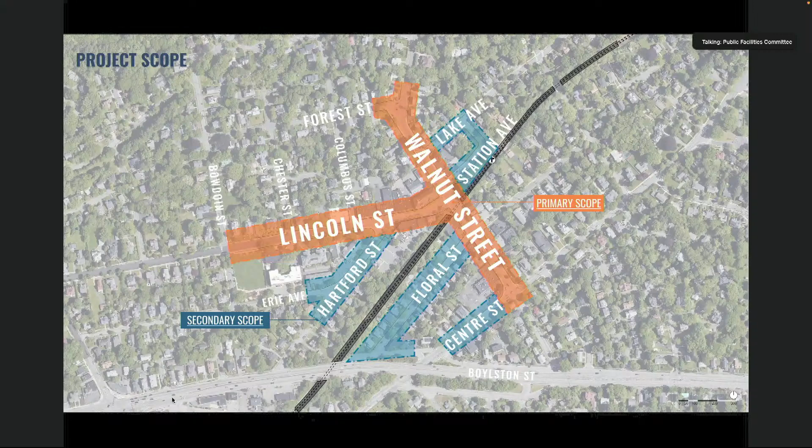So the first slide encompasses the primary scope of work, which from the very beginning—Lincoln Street to Walnut Street—was the key part of this whole Newton Highlands renovation project.

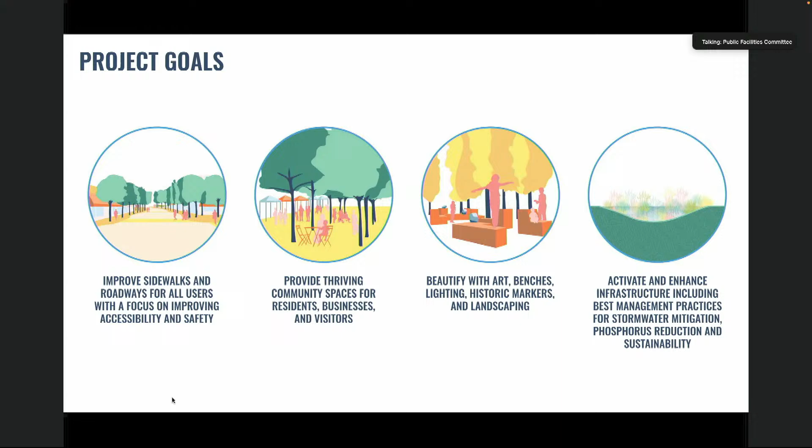We discussed intersection by intersection through this whole concept, and we came up with four intersections plus one additional item for lighting: the intersection of Lincoln and Bowdoin, the intersection of Lincoln and Hartford, the intersection of Walnut and Station, and the intersection of Walnut and Floral Street—with different solutions for each.

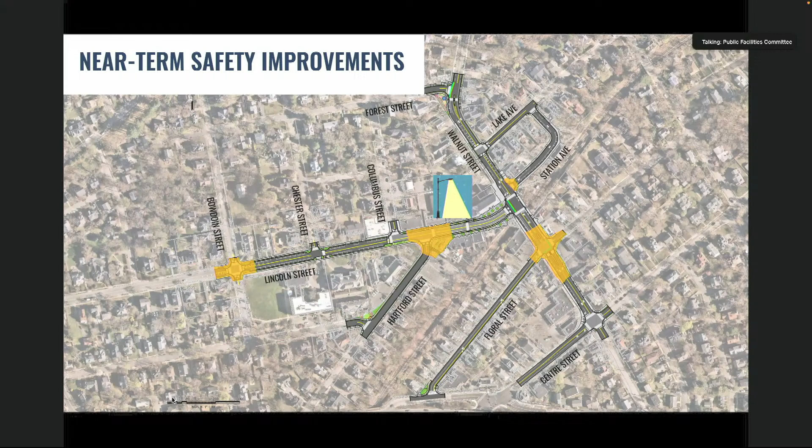On the next slide is the existing conditions about Lincoln Street and Bowdoin, at the Hyde Playground with Bowdoin Street and Lincoln Street. As Barbara Darnell from the Highland Area Council can attest, there's been a number of accidents at that intersection—there was even a pedestrian hit. So we decided that was one of the significant improvements we needed to make.

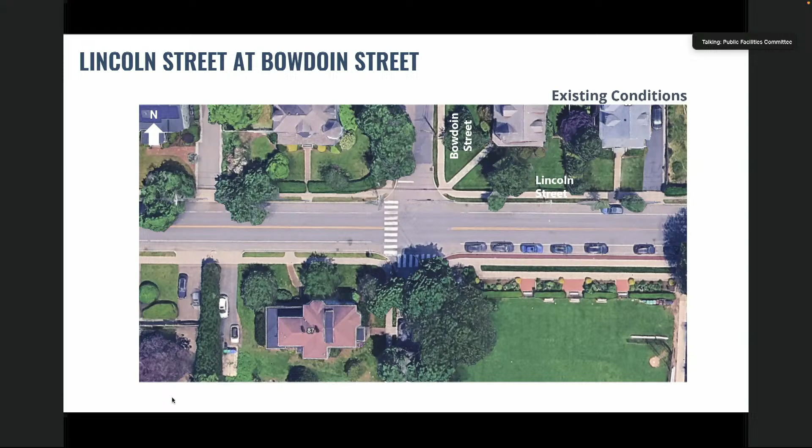The next slide talks about what we were trying to accomplish: making the crosswalk shorter, similar to what happened in Newtonville, having bump-outs to make everything shorter, and a raised table to slow everyone down. This is a straightaway in Newton Highlands where people usually pick up speed—even with police-directed patrol in the area, there's still a significant amount of speeding, especially on the straightaway.

One reason we viewed this as a significant impact is the Hyde Community Center has been known for Friday night concerts for the last 19 years, drawing a significant number of people every Friday night in June, July, August, and part of September—anywhere from 200 to 400 people on a typical Friday night, and a significant number cross at that crosswalk.

So we're also talking about having an RRFB with a flashing light on the crosswalk, so that people going to Hyde Playground, whether to use the kids' play area with their families or to go to the bandstand, can cross safely. We figured this is an important intersection to take care of for safety.

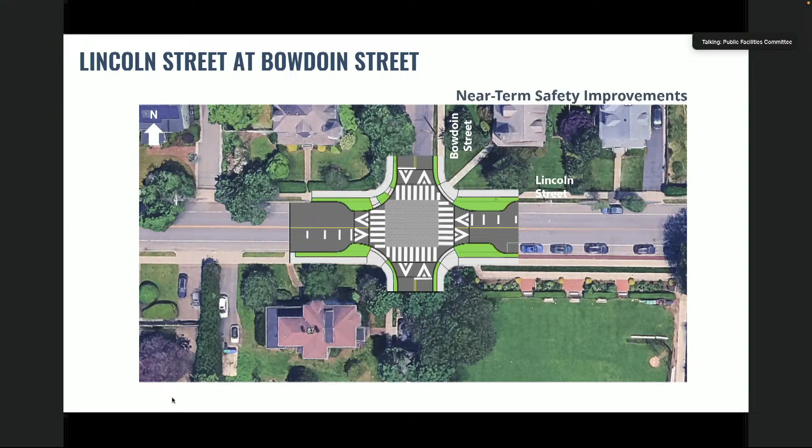The next street we looked at, also a high priority for the working group, was the intersection of Lincoln Street at Hartford Street. It's a very wide intersection on Hartford Street, known to be a U-turn haven for anyone coming down Lincoln Street. There's usually a no-U-turn sign that people go around and knock over while making the U-turn.

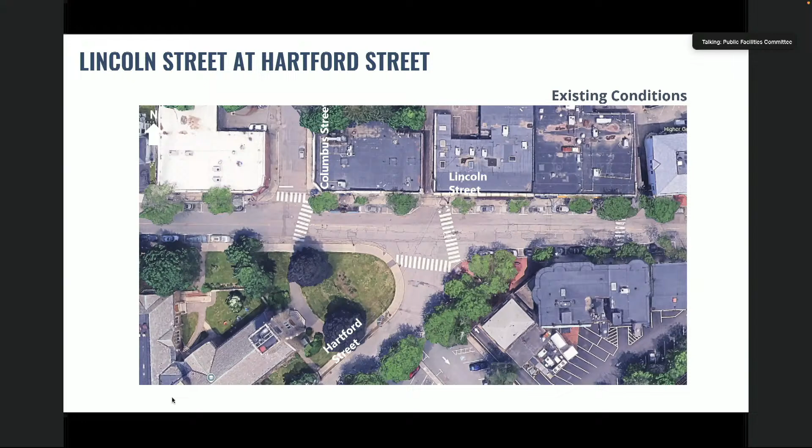Newton police have had directed patrols where they sat there only 10 or 15 minutes and would pull 3 or 4 people over. So just the cars going through that intersection has made significant impact because it's such a long crosswalk.

Also because it's such a large entrance to that street, it has become a significant safety issue. And that's the existing condition. So there's a number of things we're going to be trying to do here with Rodney Barker Square, which is on the corner of that intersection. We'll be talking about expanding it, which would make the intersection and crosswalk significantly smaller.

We're also talking about putting an RRFB in that intersection for that crosswalk, because there's a significant amount of crossing from the parking lot in Newton Highlands across Rodney Barker Square and across that intersection. This is going to have significant safety improvements for that intersection, and I'll talk about Rodney Barker Square in a little bit.

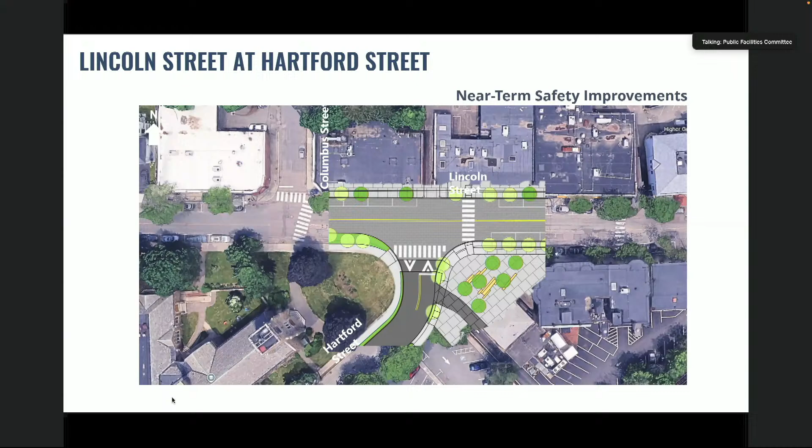If everyone knows, Rodney was a former city councilor, former school committee member, and he, with the city council a number of years ago, made this Rodney Barker Square. However, there's significant problems with it. A lot of the improvements in the Highlands were done in the 1970s.

The Rodney Barker Square is made up of bricks, and the bricks have been popping up because of tree roots and other things. It's been needing for many years to have a flat surface for people with mobility issues, because there's a number of people in nearby housing who are in wheelchairs that have a hard time getting through this because of the bricks.

What ends up happening is, as bricks keep popping out, we put asphalt patches in for the city. But basically this area is the center of Newton Highlands, and by having improvements there, it's going to have a significant positive impact on Newton Highlands.

On the next slide is the concept plan. We're talking about planting, and one of the things the working group would like to do is actually start meeting with the community to get feedback about building Rodney Barker Square—where do the trees go—as we're putting porous pavement in different places.

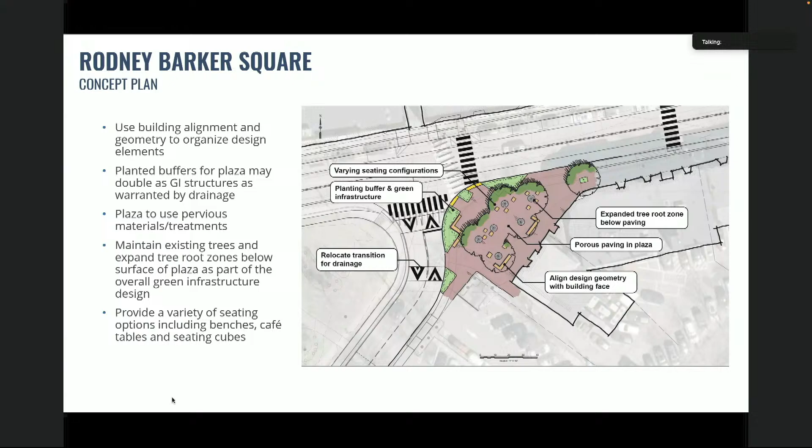Right now people come off of Lincoln Street at high speed, hit Hartford Street, trying to get to Route 9 because that's where Waze is bringing them. It creates a high-speed intersection at that point, and as we do this safety work, it will make a significant positive impact.

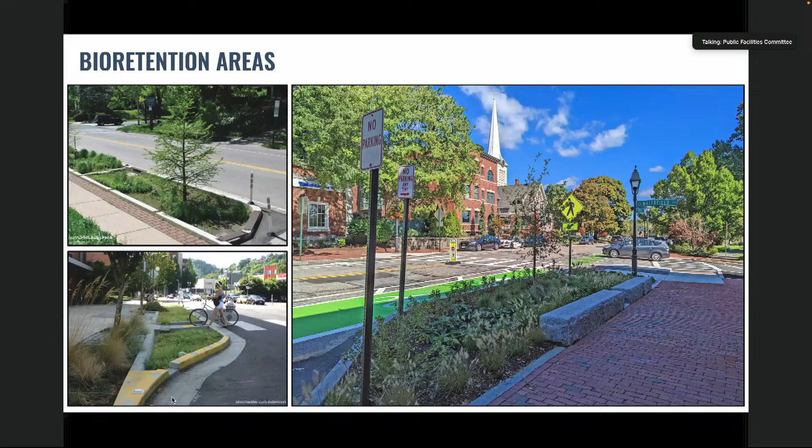There's a number of slides here about green infrastructure, bioretention areas, connected plantings and tree trenches. What I want to say is the working group really wants to get feedback from the Newton Highlands community about what the result should be—what the trees should look like, how the green space should be.

Whenever the commissioner has a community meeting about Newton Highlands renovations, there's usually a large turnout. We definitely think there will be a large turnout of people giving feedback about what Rodney Barker Square should do, how it should look and be used—both because it impacts all the restaurants with table seating and benches where people get their food and end up staying, and whether there's lighting in the trees or how the configuration is.

So we don't have a solution for that yet. However, we're going to be working with the community to come up with a solution as the working group continues working on different Newton Highlands projects.

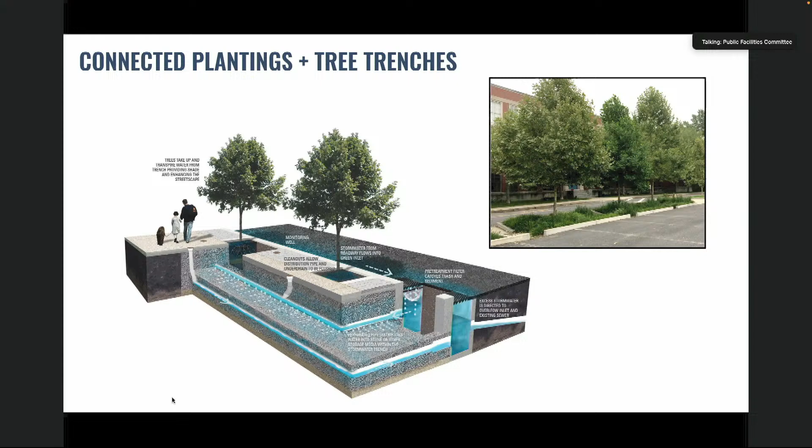Now we move on to Walnut Street. The first one we have is Walnut Street at Floral Street.

The existing conditions - this is also a street with significant speed and a significant amount of traffic going into O'Hara's restaurant at that intersection. There have been people hit in the crosswalk there. There's a lot of cars moving in many different directions, and it has had some significant safety issues with the community.

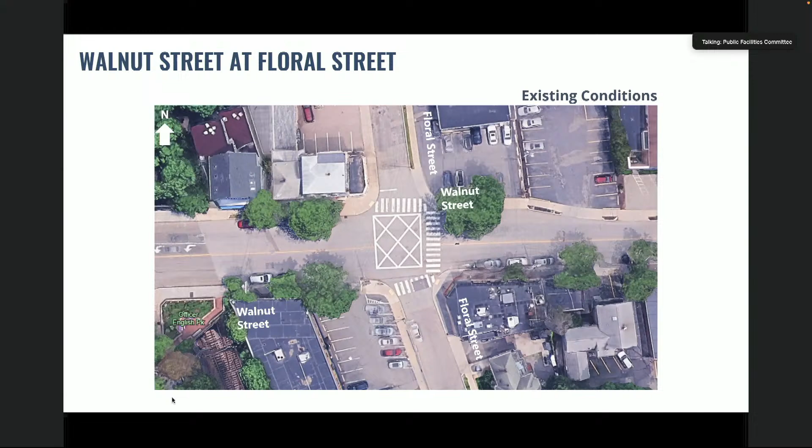So at the Floral Street, Walnut Street intersection, we're talking about bump outs, a shorter crosswalk to get across Walnut Street, and islands to slow people down as they try to get to the lights at Lincoln Street.

It also makes the Floral Street and Walnut Street intersection much safer for the community, especially given the amount of usage in this area. We're also talking about putting another RRFB in that location, because a lot of times people are coming off the Centre Street intersection at high speed to hit that intersection, and we're trying to make it much safer.

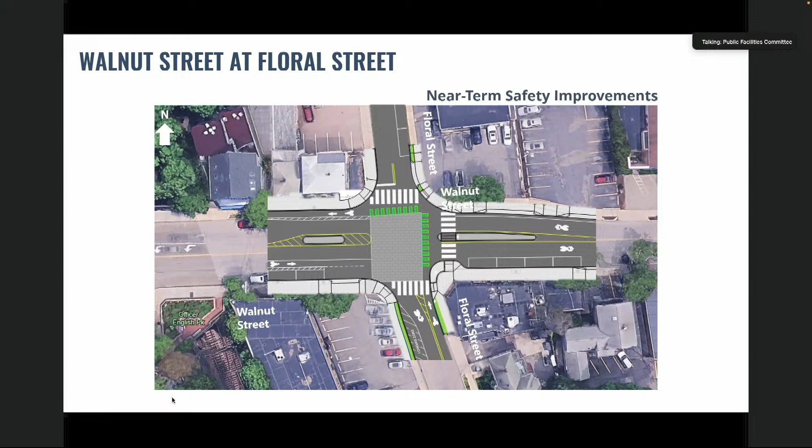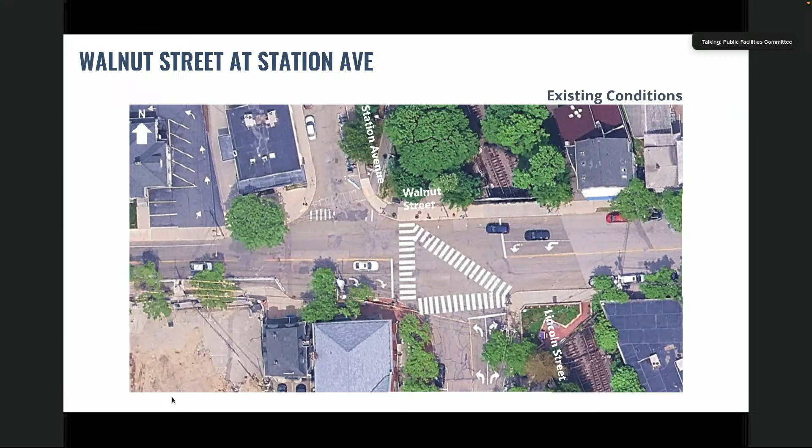We also have the Walnut Street at Station Ave intersection. That intersection is the center of people going to the Newton Highlands MBTA station. As you can see, it's a wide street at Station Ave, and we're talking about putting bump outs to make that intersection much smaller.

Every decision hasn't been unanimous - there's a lot of community input about different directions on phase 2. What the working group decided was, we're probably 80% there. There are some questions about right-hand turn lanes off Lincoln Street, left-hand turn lanes off Walnut Street, and other things in that area. So the working group said, until we get closer to identifying the funding, and if this project does get broken into smaller sections, we may not be dealing with this for a number of years.

So instead of going through a whole community process fighting over that last 10 to 20%, we decided to focus on the things we can do now, and we'll come back to this as we go through the whole phase 2 implementation.

There were also discussions about bike lanes, particularly painted bike lanes around this area. We also had many discussions about parking, and about the right-hand turn lane coming off Lincoln Street a number of times, and how that impacts traffic on Lincoln Street and Walnut Street.

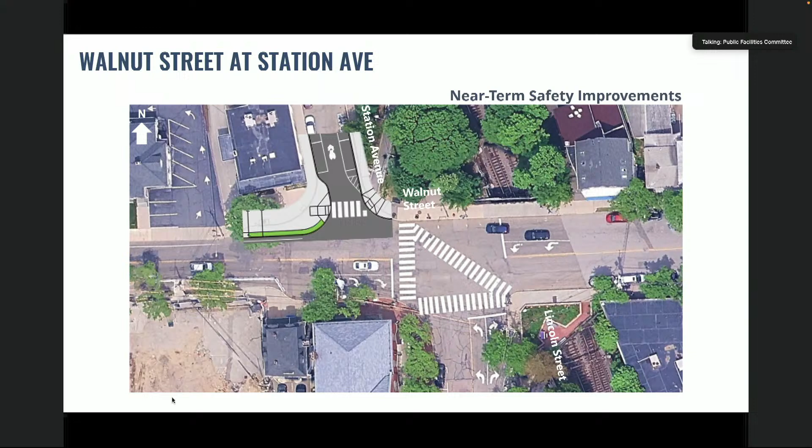The final thing we discussed was street lighting in the village center. If we make the impacts on Rodney Barker Square - for many years, all the businesses and a lot of the users of the Highlands and residents have said the lighting in the Highlands is really bad. Once you hit night, it just doesn't support the economic development of these businesses and impacts the neighbors and all the members of the Highlands community.

So we added in, just on Lincoln Street, some significant lighting changes that would have a positive impact on the community. We still believe that's a safety improvement because there's a lot of foot traffic going into restaurants and stores at night. We think this would both enhance the Highlands and enhance the safety of residents.

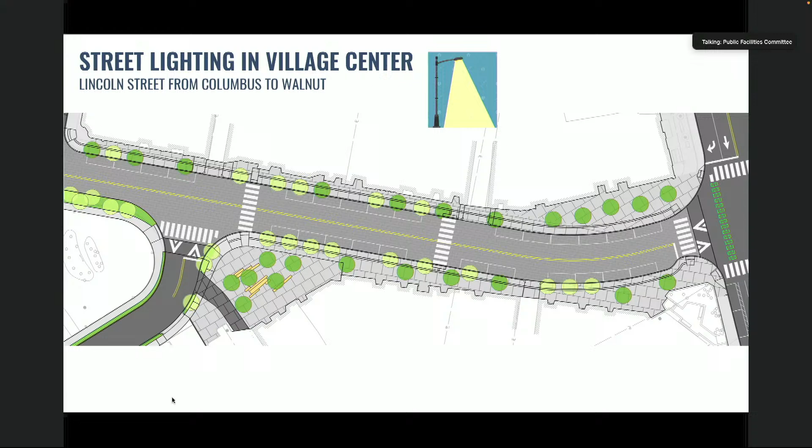So getting to cost: the Lincoln and Bowdoin Street intersection, the consultant estimates at $425,000. The intersection of Lincoln and Hartford Street is $600,000. Rodney Barker Square, where we rip it all out and start from scratch, is $850,000. Walnut Street at Floral is $625,000, and Walnut and Station is $135,000.

The street lighting would be $750,000, with a total budget for all the safety improvements of the Highlands of $3,385,000. The working group did work together to try to prioritize, if these safety improvements were going to be built over a number of years, which would be the priority.

It went back and forth whether Hartford Street or Bowdoin Street would be the priority, but the Lincoln Street intersections are the most dangerous intersections for Newton Highlands residents. However, since we went back and forth before the last meeting, we talked to CFO Maureen Lemieux and to the mayor, and instead of trying to break this into a 2 to 3 year project, the concept - because it impacts people's safety - is to bond this project at $3,385,000.

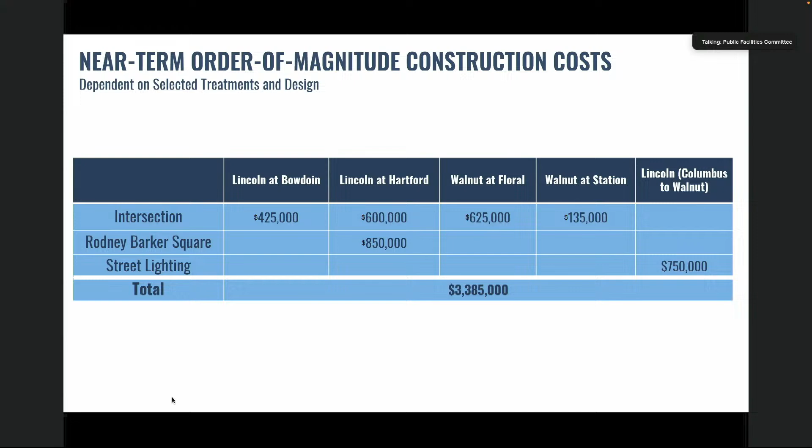Once we get to construction documents and get all the exact numbers for this, if we bonded it, because we've been talking about this for 3 years, we can make some significant enhancements to Newton Highlands, and it could be started and hopefully finished in 2027.

That's my presentation. But a lot of people put a lot of work into the working group, both on the administration side and the community side. Normally a working group is just within city staff and residents, but we opened the working group meetings to the community so people could be there. And even though we weren't running public hearings, we were taking comments from people because everyone had a lot of viewpoints over the last 3 years.

The working group is not going to end. We still have a number of things - there's some questions about bicycle safety, and some questions about how Rodney Barker Square will be. So the working group will be ongoing, and at the same time we're going to be working with the consultant. The engineering for these intersections also ties into the master plan, so the master plan is not ending. If the funding happens, we could do it in certain sections. Thank you very much for the time, and I appreciate all the work that City Council has done with this committee to make this project successful.

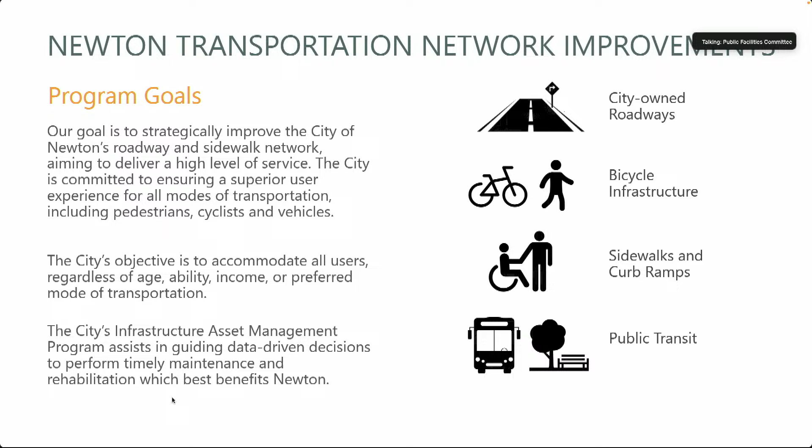In order to do this, we use an infrastructure asset management program. That helps us really use data to drive the decisions that we make so that we can be the most effective and efficient in utilizing city dollars to make the most impact on the transportation network.

So infrastructure assessment, like Shauna said, we look at roadways, bike infrastructure, sidewalks, curb ramps, traffic calming, but the biggest infrastructure that the city maintains, or one of the biggest, is the roadway network. The pavement structure throughout all the roads in the city is one of the most heavily used assets that the city owns and maintains. So it's really important to have a pavement management program and to make sure that we're keeping roads in good condition.

So having this data and having this system helps us to make sure that we're really providing the right repairs on the right roads at the right time.

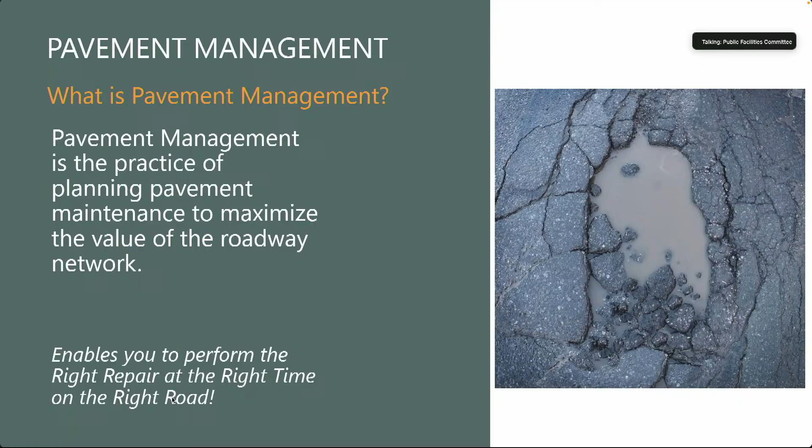To give a background, we scan the roads every 2 years. The roads were last scanned in 2024, so we're looking to rescan the roads this year. We use LiDAR and photography technology to drive all of the roads in the city, all the accepted roads that the city maintains. It provides photographs approximately every 10 feet, and from those photographs and videos, we can discern all of the pavement distresses on all of the roadways throughout the city. It's a very cost-effective method.

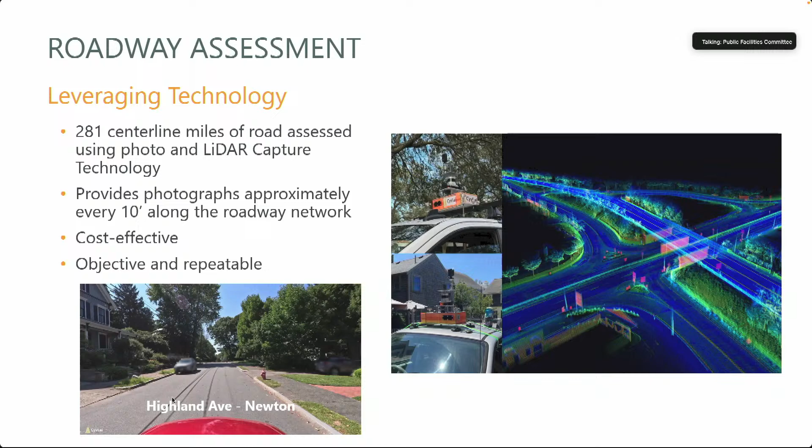It gives us new data every 2 years to make sure that all of our decisions are objective, and it's a repeatable process that we try to do every 2 years to give us fresh new data. The roadway conditions are very variable based on how the roadways are used with traffic, but also for winter cycles and weather. Last year we had a really bad winter, so how the roads are affected by that changes from year to year. On the years that we don't scan the roads, we try to use modeling to make up for that, so we're still making informed decisions. But as we get further away from an actual roadway scan, the more we're relying on modeling than actual numbers.

Once we scan all the roads, they get rated on a system from 0 to 100. It's called a pavement condition index. So if you see PCI throughout the presentation, it's just an index of what the score of that road is - 100 being the best, just paved yesterday, to 0 being almost a gravel road, really hard to traverse. We scan all of the asphalt roads in the city.

The concrete roads are also part of the program, but we deal with those in a different way. So once all the roads in the whole city are scanned, they're given a score between 0 and 100, and we put them in these maintenance categories.

100 being defer maintenance - you just paved it, you can wait a few years before cracks start to form. Routine maintenance - we have some practices like crack seal and fog seal to help mitigate cracking and make sure the asphalt pavement surface remains pliable.

We have preventative maintenance. We've seen this around the city with bonded wearing course, probably the most used one. But we've also done rubber chip seal, microsurfacing, and cape seal in the past.

When a road gets to about 70, it's in that minor rehabilitation category, which is mill and overlay - probably the most standard practice used in the city and throughout the Northeast. We've also done some other things like cold in place and hot in place recycling, which I'll get into later.

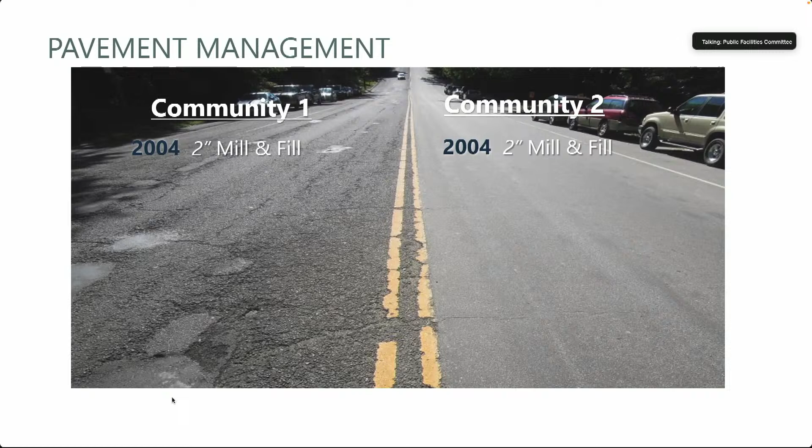Back in 2004, they came together and did a joint project. One community paid for half of the bill and the other community did the same, and they did a 2-inch mill and fill, which is they mill off 2 inches and come back and put 2 inches of new pavement. So the road was brand new in 2004.

In 2010, Community 2 came to Community 1 and said, we want to preserve this road. We want to do crack sealing and microsurfacing to really preserve all the money we spent in 2004. Community 1 didn't opt to go into that, so Community 2 did just their side of the road.

This picture was from 2017, so you can see the 2 different methodologies here. Community 2 has the optimized approach in 2017 - what they're looking to do again is crack seal and microsurface, which is a lot cheaper than doing another mill and fill or reclamation.

So at that point in 2017, it was twice as expensive for Community 1 to now come in and repave this road, whereas Community 2, having done the pavement preservation throughout the years, is doing it at a much lower cost and saved twice as much money.

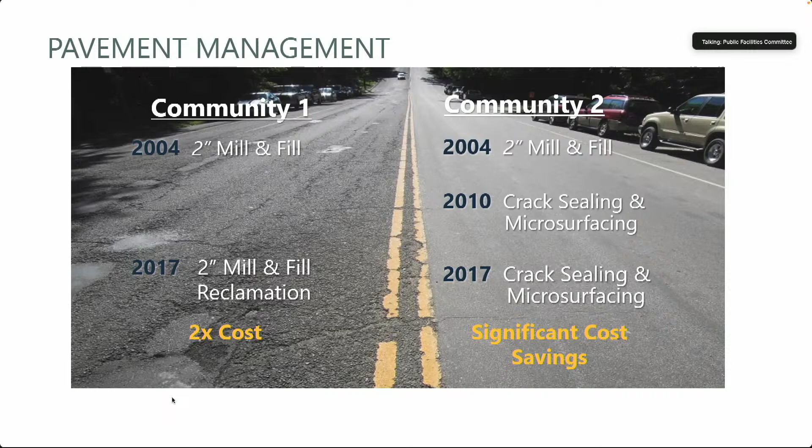Along with that, you can see the picture of this road. Which one would you rather drive on? Throughout that whole period, the people in Community 2 had a nice road to drive on the entire time, whereas in Community 1, it was really good when they paved it, but now it's really bad, and it'll be really good again when they pave it, but they're spending twice the amount of money.

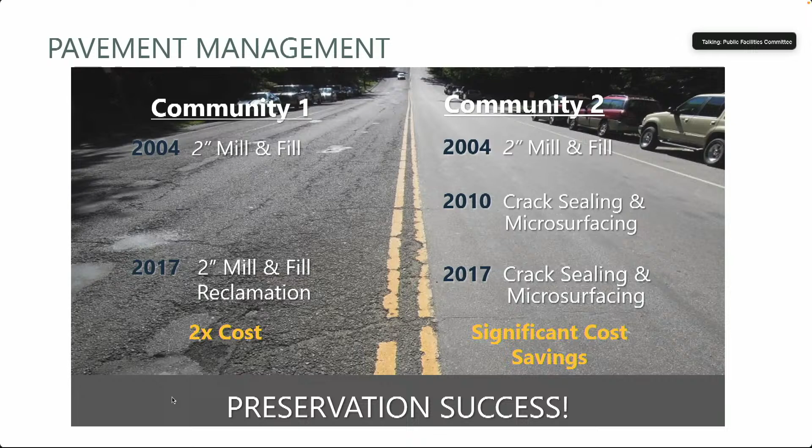So Community 2 had a preservation success, and that's what we've been doing in the city of Newton for at least the last 10 years.

So these are just some of the techniques we have in our toolbox. Once we scan and figure out what the PCI of the road is, we put it in those maintenance categories, and then we have a few different types of techniques we use in Newton to take care of those roads. One is crack seal—that's where cracks open up, we fill them so water can't penetrate into those cracks, freeze, and start to break apart into potholes.

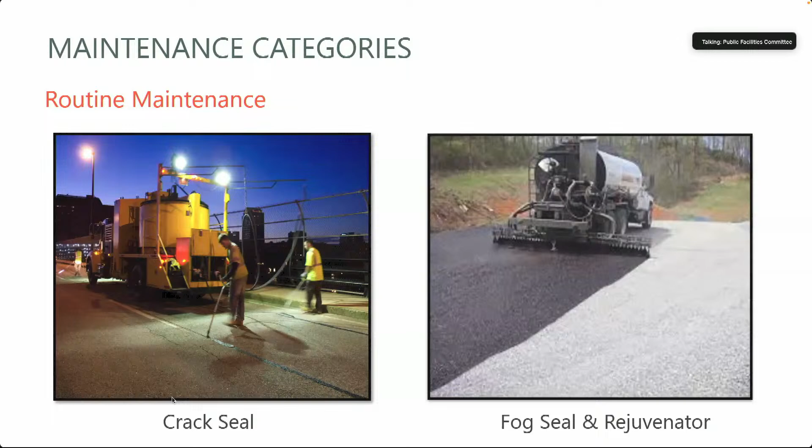Microsurfacing is very small, kind of like a driveway sealant, but more robust for roadways, to seal out the whole surface, stopping cracks from forming and keeping out water as a preventative treatment. Bonded wearing course is a very thin overlay, also very pliable. We just did this on Homer Street and Center Street recently.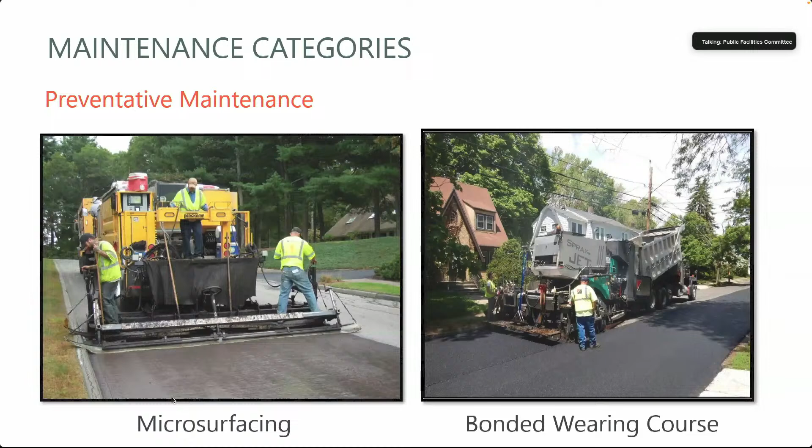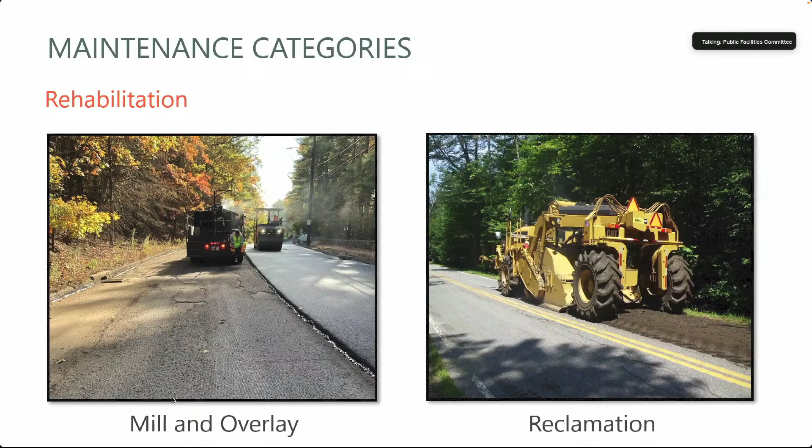Mill and overlay is one of the most widely used ones. We just did that on Beacon Street this year, and Fuller Street. That's probably the most common one. Reclamation is when the road gets really bad—you have to fix all of the sub-base material, all the gravel beneath the asphalt. That's another technique we use when roads are really bad.

Hot in place recycling and cold in place recycling are also done on bad roads, but they use the asphalt that was already there to recycle it. We just did a hot in place recycling project on Grove Street and Walnut Street, and we've done cold in place recycling in the past, with more projects coming up in the next year or two.

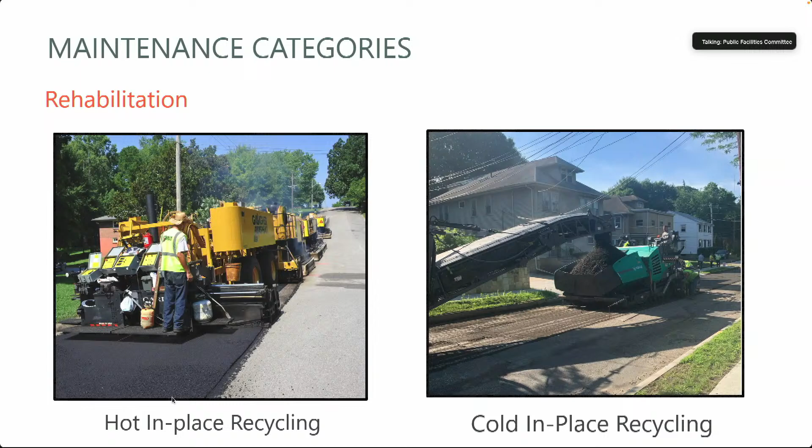With the roadways, we've also looked at the sidewalks. City staff actually went and redid the sidewalk inventory. It was originally done in 2022, and they just redid it last year into this year. There's approximately 415 miles of sidewalk compared to 270 miles of road, so there's a lot of sidewalk in the city.

So when we do paving projects, especially mill and overlay, we look to upgrade curb ramps and sidewalks along with those projects. There are about 5,400 curb ramps in the city. We've constructed 954 of them since 2017, and approximately 35% still need some work and aren't ADA compliant, which we're trying to address one project at a time.

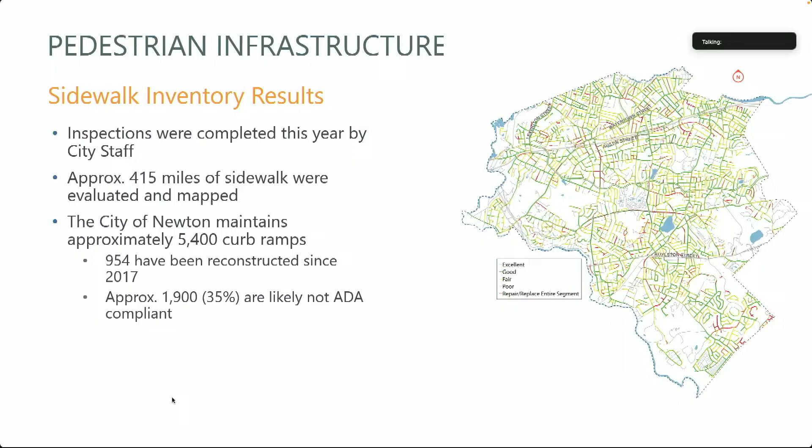So the program, history, and results. For current conditions, we're in a year where we're not scanning—we're looking to scan this year. In doing some modeling, we update our past data to account for degradation since the last scan. We also input all the roadways that have been paved: if a roadway has been paved, we increase the PCI back up to 100. If it's been crack sealed or had other treatment, we increase the PCI a little, but not all the way to 100 since it's not refreshing the whole road. Right now, the current PCI is 75.

It's not going to go up every single year, but it is trending in the right direction, and ultimately that's where we're headed.

The current condition of the roadway is a 75 overall. After the inspections, in a year where we don't scan, we make adjustments to try to make sure we're comparing apples to apples from year to year.

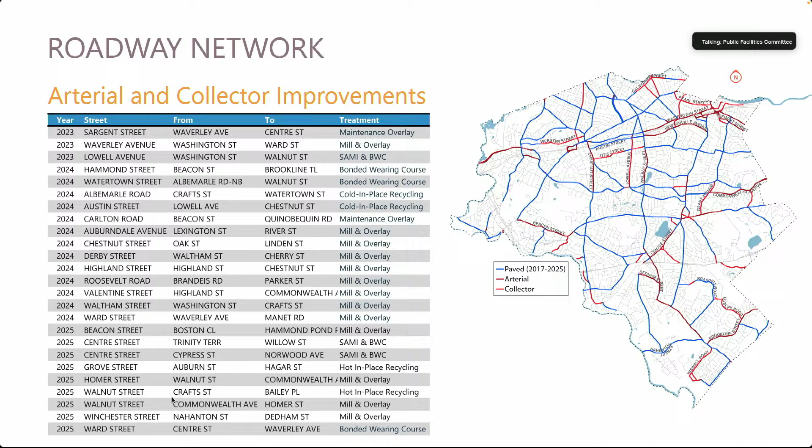We track paving history, obviously. From 2017 to 2025, the DPW has paved almost 112 miles of road. That's a significant improvement, and it really shows how the PCI increase comes from all these projects coming together.

DPW uses a lot of different techniques. Many communities will just do crack filling and mill and overlay, but we're looking to touch as many miles of road every year as possible to keep the network in good condition. For 2025, we're looking to pave about 21 miles of road, another significant year of improving the roadways.

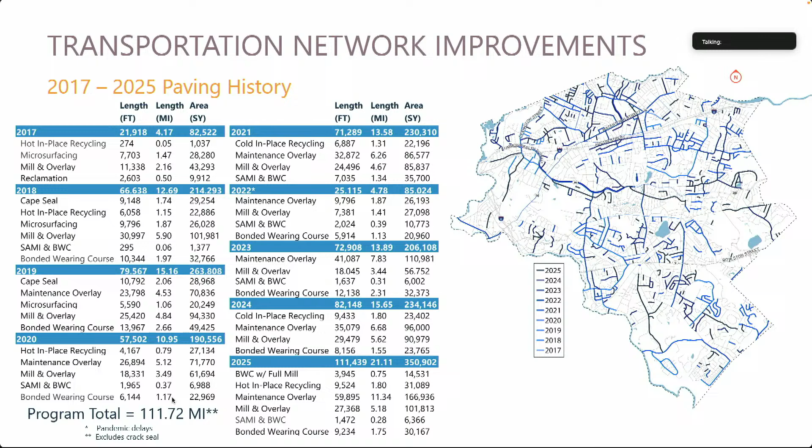Major sidewalk construction in 2025 included 4.9 miles of sidewalk, which is pretty significant. Sidewalks are a lot more expensive than asphalt paving, but they last a lot longer too, so that investment will really improve the sidewalk network for people walking.

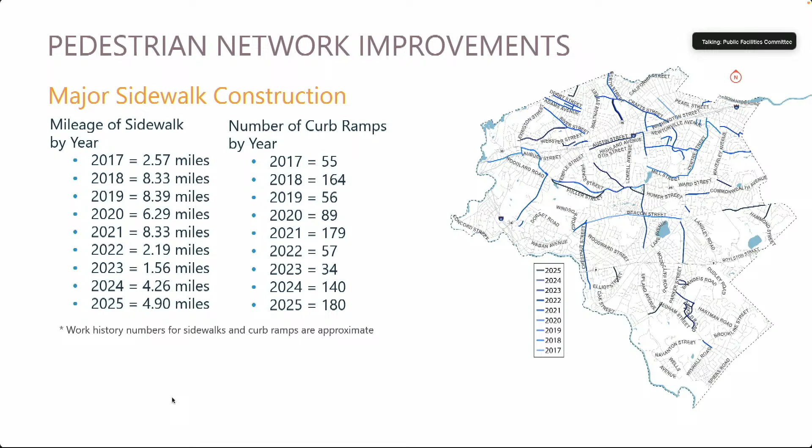Although we have contractors doing a lot of this work, the city DPW crews also do a lot themselves. Last year DPW crews installed 47 ADA ramps and 1.5 miles of sidewalk. They also do a lot of patching and pothole filling. As we saw this winter, it was a pretty bad pothole year, and DPW was out there filling lots of potholes. We want to highlight the importance of working together with contractors and city forces to get this work done.

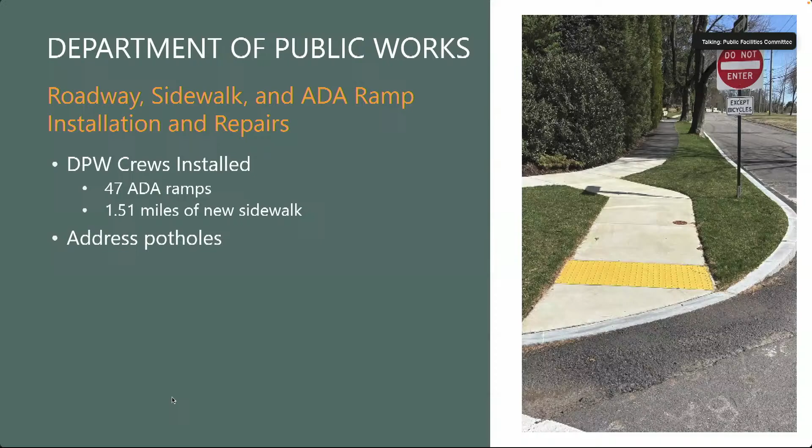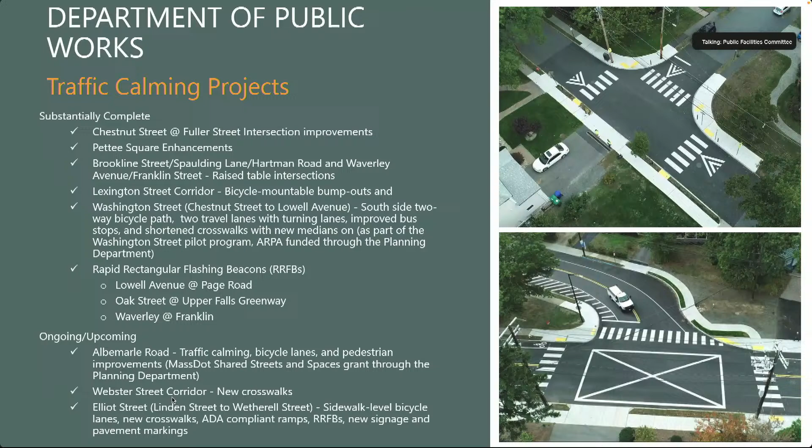Along with the program, we also integrate traffic calming and bike lane projects. When we're looking to mill and overlay a road, we integrate with the traffic department to make sure these projects are coordinated and seamless. There are a lot of projects we've worked on with them, which you can see here, along with some ongoing and upcoming projects.

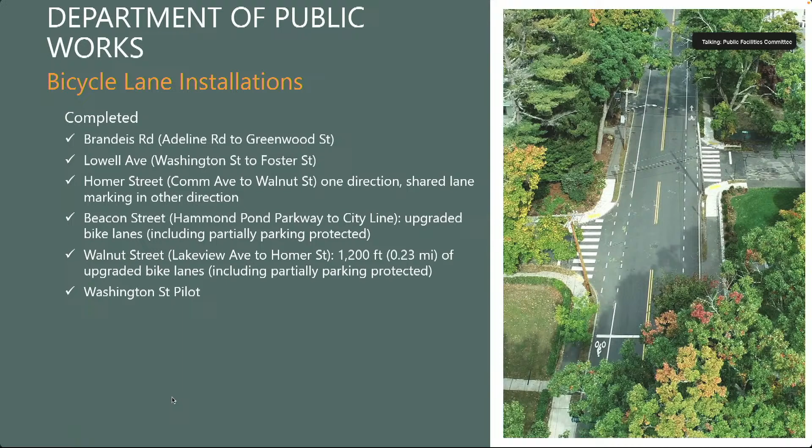Along with that, bike lanes: last year on Beacon Street, and then Walnut and Homer right around City Hall, when we paved them we implemented bike lanes for these projects too. So we're also working to improve biking around the city as well.

All right, so programs and updates.

Once we have all this information, we know the existing conditions of the roadway network and the transportation network in the city. We can use some modeling and key factors to make sure we're planning projects accurately and efficiently. One thing I want to point out is the increase in cost over the years.

When we started this program in 2017, the cost per square yard for a mill and overlay project was $30 a square yard, so money got a lot further than it does now. In 2025 last year, we saw a price of about $90 a square yard, and increasing that with inflation for this year, we're looking at a planning level cost of $94. The money isn't going as far as it used to, with inflation and rising construction costs, particularly after COVID, but over the last two years as well.

Along with those paving projects, we've also, like Shauna said, added in a lot of other non-paving improvements like traffic calming, bike lanes, drainage improvements, and things like that. So we're not just using this money to pave roadways. A lot goes into these projects to make sure that when we're paving a road, we're not coming back the next year and doing something else and ripping it up, especially with utilities.

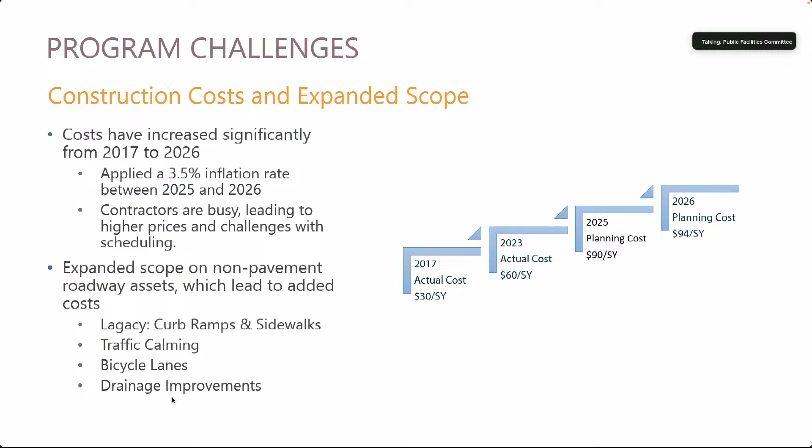So taking all those factors into account, you can see the existing conditions on the right, which is the PCI of the road, and our budget on the left. We also take into account a lot of other things when we look to pave roads, like we talked about earlier in this meeting, the water system, sewer upgrades, and utility upgrades. We try to coordinate with National Grid and other city departments to make sure all of the utilities underneath the road are not being affected by these projects.

We take into account community needs, sidewalks, ADA, bike network, like we talked about, but also the cost benefit value. That's a data-driven metric we calculate for each road based on the existing condition, the type of roadway, how much traffic it sees a day, the recommended repair, and the life extension that repair will give it. That just helps us prioritize which roadways would benefit most from an expenditure or improvement.

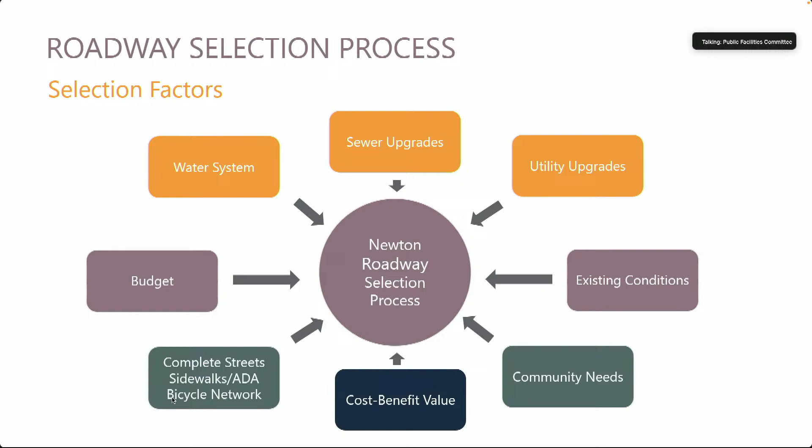So the annual budget, the typical transportation improvement budget, is 9.5 million. We allocate about 8 million of it for actual paving projects. The other 1.5 million goes to things like traffic calming, intersection improvements, any engineering design or planning that needs to happen depending on certain road situations, and highway maintenance. How we allocate that money from year to year is set up so that we're spending a good percentage on routine maintenance, preventative maintenance, minor rehabilitation, and maintenance overlay.

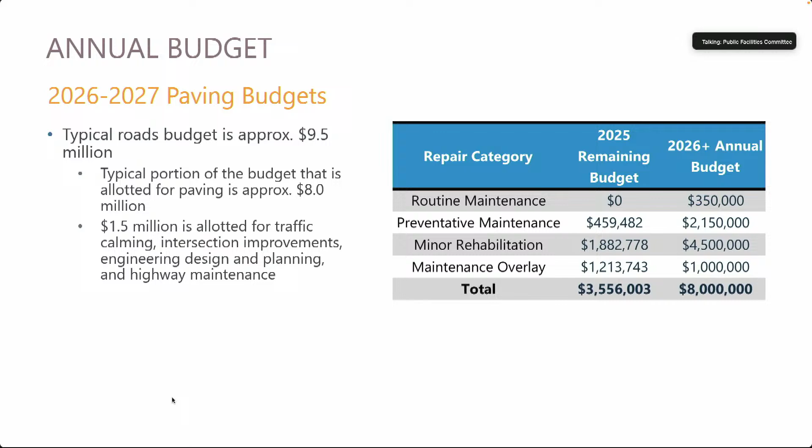For this upcoming year, we have some of the plan work here. It's not all of it, but we have some remaining roads from 2025 - roads that were contracted last year that the contractor still needs to finish up this year. And then we have some new projects in 2026 that we're looking to do in the pavement preservation, preventative maintenance categories, and minor rehabilitation you can see there in yellow. Those are coming from those two bins there.

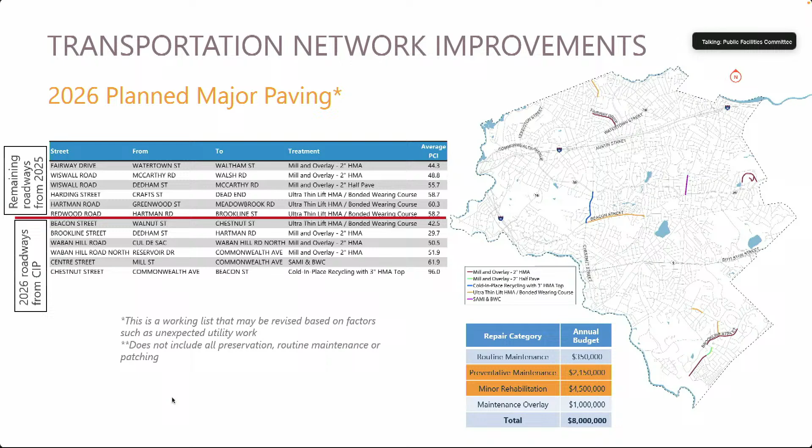The maintenance overlay program continues at about $1 million a year. We have a lot of roads left over from last year, but it's probably only about 25%, maybe 20% of the roads. If you remember from last year, we were going to pave I think 152 streets. So the contractor made a really big dent on those, but have some more that they're actually paving right now. And then we have a new list of roads that we're looking to pave this year in 2026.

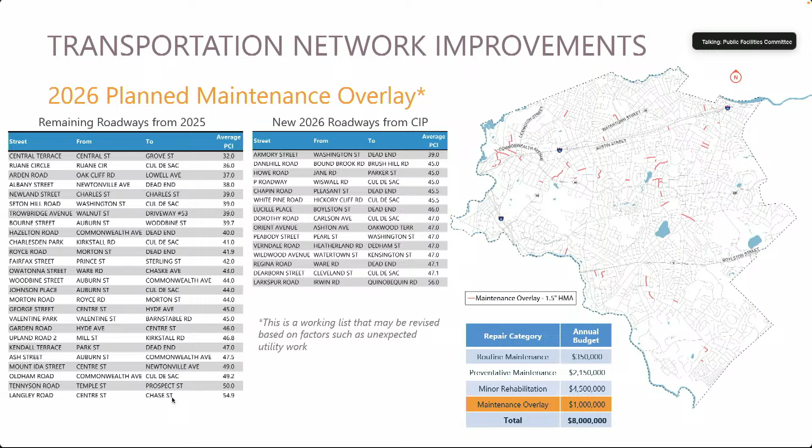We also have some planned sidewalk and intersection improvements. We have many locations of RRFBs that we're looking to put in. You can see the last one there, Lincoln Street at Bowdoin Street, that the commissioner mentioned earlier. And then we have the Nahanton Street pedestrian improvements project, the sidewalk there.

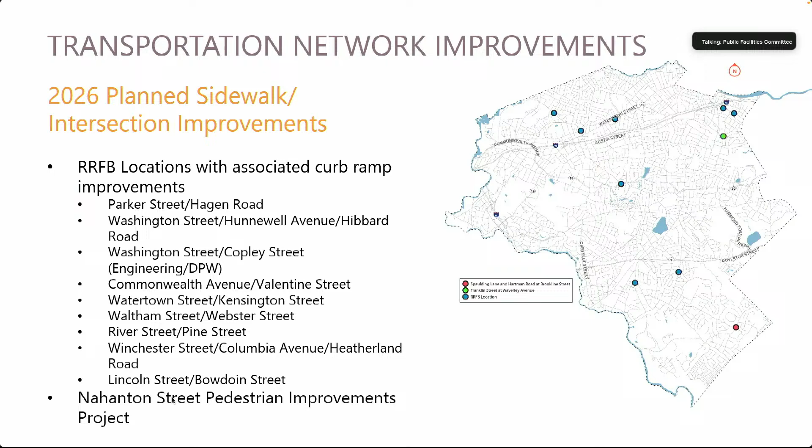We also have some CIP sidewalk improvement projects. We had started around some of the schools last year with the Williams School work. And then this year, we're looking to do some more at the Ward School, Cooper, Burr, Bowen, and then the Lincoln Elliot School.

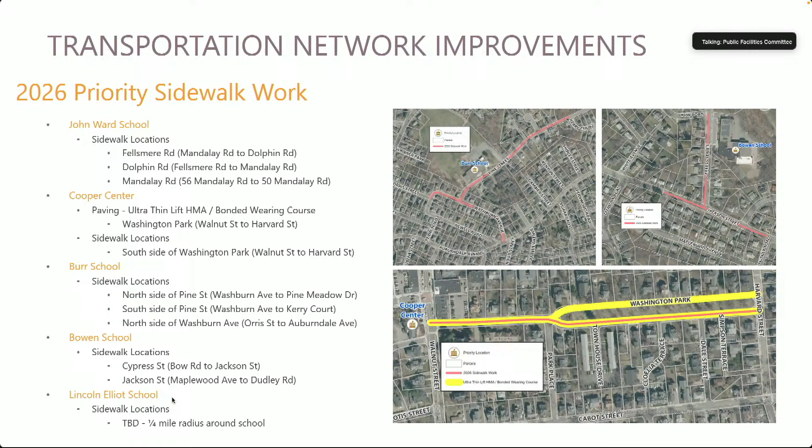So taking all of this into account and the budget that we have, we use a lot of the data to do some funding modeling. This takes into account the existing conditions of the roadway, the planned budget from year to year, and what that would look like if you spent it in a responsible way.

The current budget on the bottom there shows that spending the 8 million we're spending a year, you'll show decline in the PCI over time. But by changing some of these maintenance strategies and having those paved roads in preventative maintenance, tackling those with the treatments that are important for those roads to keep them in good condition, we can try to stretch the dollar and make it go further than we expect.

So in showing that last slide, going from $30 to $94 now, you can really see the impact - the dollar's not going as far as it used to.

As this program evolves, it's not meant to be stagnant. Every year we look to update this, and we do it pretty much continuously, working with DPW every week. This year we're looking to rescan the roads, so once we have that data, we can see how bad the roads were affected from this winter season. It will help us recalibrate and prioritize the roads for the upcoming years. Every year we try to look at having a 5-year cycle or CIP, so we look to reprioritize those with the new information when we get it.

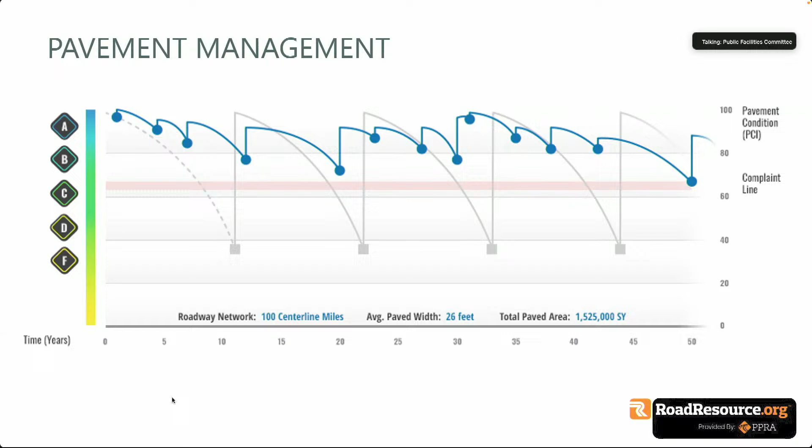The costs have been pretty astronomical going up. How much is that impacting our ability to do more? A lot, a lot. As you can see in the funding slide, just to maintain what we have right now would be 18 million a year, and obviously we don't have that. So what we've been trying to do is use these pavement management practices and the preservation-forward optimized approach, the blue line on top, to spend about $2 a square yard to keep that road where it is and prevent it from sliding down that scale. Prevention is even more important. Right, so basically like this slide shows, we're trying to catch it before it falls off that drop-off, trying to use the money in the most efficient way possible because we don't have all the money in the world.

I do want to add that we've received significant funding for paving over the past few years, substantially more than the 9.5 million, which has allowed us to do a significant number of streets. Yeah, you did get some extra money.

I just want to put in a plug for California Street. We really could use some traffic calming there, and it was supposed to be part of a project, but it's been years now, and I'm feeling like people are sort of feeling ignored. That's a street that, when it's not absolutely congested during rush hour, is a long straight road where people can pick up speed. There's an important crossing over to the park and another one further up at the entrance to the Charles River Path. There've been a number of close calls there, and I'd like to see some traffic calming sooner rather than later.

One other thing I did hear noticed about, especially in the past icy weather, is a corner over at the Underwood School where there's a puddle. It's up on the church side of it, across from the front of the school - I want to say the southeast corner. It puddles up and has been like that for a long time. It's kind of a small thing, but it's a crossing area where the kids cross.

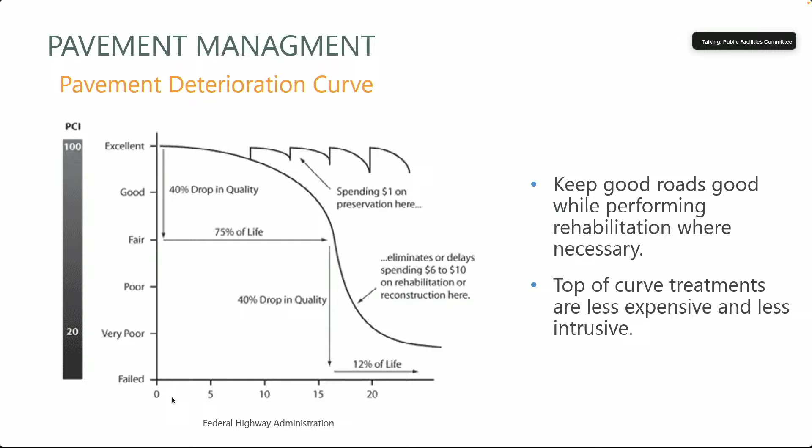Thank you. I just wanted to make sure I understood the answer to Councilor Getz's question about whether that slide showing getting to 80 would require 28 million. Her question, I thought, was whether that's a short-term thing we'd have to spend that kind of money on, and then the idea is that we'd raise our lowest common denominator of state of roads, and it would take less money going forward to maintain 80. And that the answer was yes. Is that correct?

So that funding figure is the annual expenditure per year to get on that trajectory. We redo that funding model every single year based on the inputs that change, like the existing conditions. So once we pave those roads, although we try to model for the existing conditions, it's not always very accurate. We like to have the data every 2 years to inform that. But currently, that's what we're projecting, and it changes year to year.

But would that be for each year in perpetuity, or for some number of years, and then you'd expect that number to drop? We would expect that number to drop if you're following that same principle. Would you still expect it to drop if the cost of paving materials continues to climb at the rate it's climbed recently? Yes - because the roads would be in good condition, we'd still be spending at that lower tier of repairs instead of the really expensive tier of mill and overlay. Those will still be necessary, but at a much lower rate. So it would still drop even if prices went up, because you'd be using that cheaper tier more often.

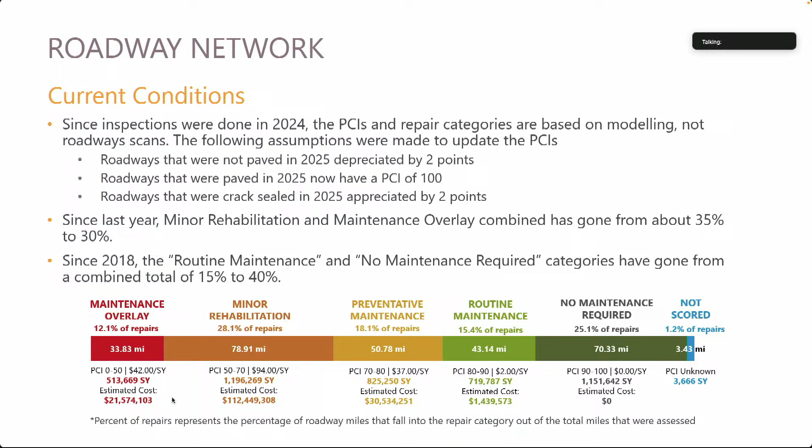So the preventative maintenance, routine maintenance, and no maintenance required—the orange and then the two greens—represents about 70% of the network. Those are roads in good condition, and because the PCIs of those are so high, it kind of offsets the reds. The one that shows local and arterials—there you can see that local roads are rated at 71, but the arterials are actually at 82, which is very high on the roads people travel the most. Because there's more mileage in the local roads, that's kind of where it averages out to the 75. It brings it down a little bit.

The micro interventions you're talking about doing—is that logistically possible? Do we have enough contractors? Because at the end of last year we had a problem with the number of contractors. There's only so much construction a city can see over the year. Like Commissioner Sullivan said, last year we spent about $12 million, and you kind of got to see what that looked like construction-wise—how many streets were detoured along with all the utility departments doing work as well, not just road paving. There was a lot of construction, and that was kind of the limit of what contractors could feasibly do in a year.

That's why that slide we showed had some roads left over from last year's program. We also added a contractor last year so that we could do more work.

So relatedly, I remember in September, maybe going into October, there were sections of the city that were a disaster because of all the road work going on. How are we planning to improve that this year?

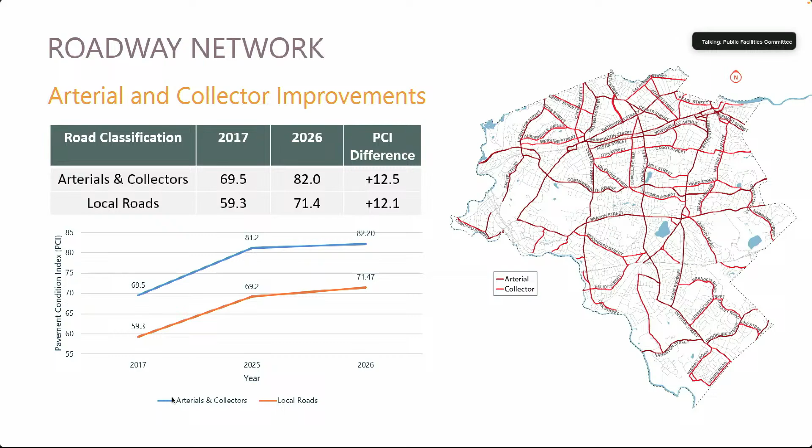Any other questions? Oh, Councilor Dumabit. So Councilor Grossman, Councilor Kalis and Councilor Leary took us on a field trip to Switzerland, and I'd like to go to Scandinavia and Japan, where I know there are advancements about alternative paving materials that can be more permeable, cooler, more sustainable. I know these come at a cost premium, but to Councilor Leary's point, also more durable — I'm wondering if we're considering those. I'm sure there are strict challenges based on what is approved within the US and that kind of thing, but what is our big picture thinking on creating more permeability and sustainability in our paving and surfacing strategies long term?

So there are a lot of different techniques the city uses that a lot of other cities and towns don't use. One you just saw that's more sustainable than traditional techniques was the hot-in-place done on Grove and Walnut Street, where they mill up the existing asphalt, inject more asphalt binder or petroleum rejuvenator, and put it right back down. So it doesn't even leave the roadway — they're not hauling it away, saving on emissions, and you're not adding heavy truck traffic that can damage the roads around it, then coming back and paving on top of that.

So there's that one, and there's cold-in-place recycling, a similar process, just cold instead of hot. There's also doing micro interventions, basically rejuvenating the asphalt that's there instead of ripping it out and putting it back. We've also looked into polymer asphalt, which the state has done a lot with — it's not necessarily more durable, it's more flexible so it doesn't crack over time, since asphalt is a lot more flexible than a concrete roadway. But in the Northeast, concrete roadways are harder to maintain because of the salt.